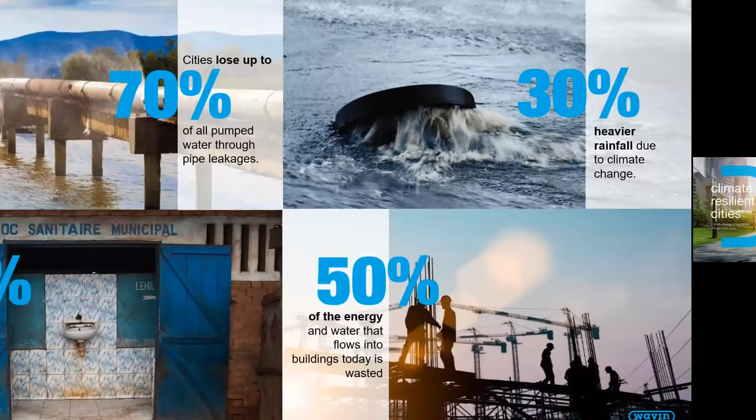It has major challenges, especially when it comes to water management. A few facts. If we look at pipe systems, especially drinking water pipe systems, cities lose up to 70% of all their water through leaking pipes. In developing countries, 50% of the people don't have improved sanitation. 50% of the energy today in buildings is wasted, and rainfall due to climate change is increasing by 30% in intensities. Those are facts that really need to be acted upon.

That's also defined by the United Nations. The United Nations sustainability goals like clean water and sanitation, industry innovation and infrastructure, sustainable cities and communities, and climate action. Those are the typical challenges that are also addressed by Wavin, and we want to make meaningful impact on this world with the challenges it has. And that's why we have the goal of building healthy and sustainable environments.

We do that based on four pillars. In line with the challenges that I just introduced, we want to improve the distribution of drinking water and make sure that it's clean from source to tap. We focus on acting upon climate change. We want to future-proof the wastewater transport, making sure that there is sanitation for all. And we want to improve the building environment, making it comfortable and healthy living inside buildings. That's what we do as Wavin.

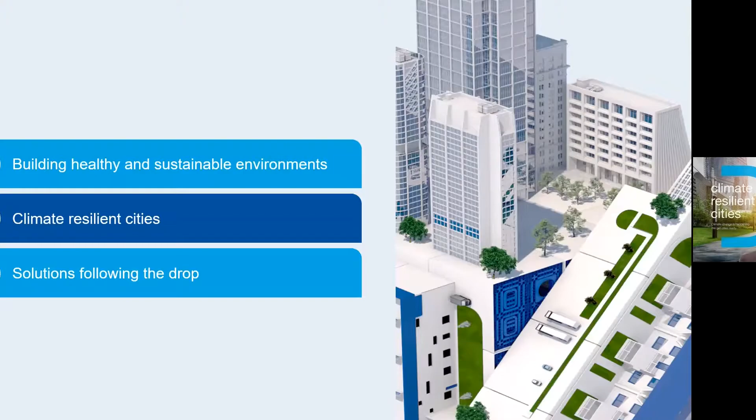Let's take the next step and zoom into the business which is closely related to stormwater management, and that is climate resilient cities. Well, there are also significant challenges when it comes to climate resilience, especially of cities. And a big driver of that is urbanization.

Cities become more compact, more dense, which means that there is less space for infrastructure to drain water away, for green areas that can absorb water. And at the same time, there is more drainage discharge to sewer, and there is more demand of clean drinking water. So urbanization puts a lot of pressure on all of our water systems.

Besides that, there are the three main trends which we see coming from climate change, which is floods, droughts, and heat. And especially in cities, heat is a problem due to the heat island effect. But what we also see is many of the cities around the world are actually sinking, especially because most cities are localized near to coasts, and sinking cities is a big problem, and that has all to do with groundwater levels. And last but not least, pollution is a big problem in cities, impacting also our environments.

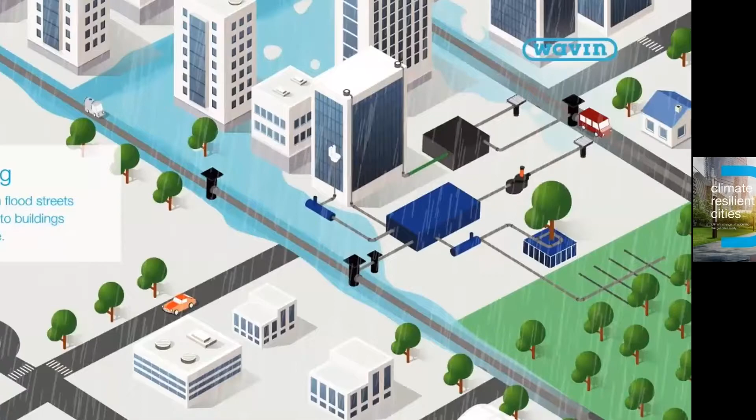I would like to dive into the climatic problems in a bit more detail. So if we look at flooding, and well, we made a video for those climate challenges that we face in cities. If you would like to watch that, you can scan the QR code, but I'll take you through it just in presentation mode.

In cities, especially because of all the hard surface, rainwater cannot go easily into the ground. And all the hard surfaces create a lot of runoff of rainwater, and all that water has to go somewhere, and it will generally go to the lowest place. So especially in a slightly hilly environment, the lowest area will soonest be flooded. And with an increase in rainfall intensities, so more rainfall in shorter periods, that will even become worse, causing all kinds of damage.

But also the other side is true. When we look at climate change, we see that the drought periods are becoming longer, which basically means the availability of water is going down. It has effect on the environment, the green spaces in cities, but it will also impact water availability in the ground, so to say.

Well, with the rainwater, when it's draining, it also takes a lot of pollution from the street. And also that is a big problem. And many times the rainwater systems are connected to our open water system. It is just draining into our rivers and seas and oceans. So the rainwater flows can indirectly cause quite some pollution. So it's very important also to have a closer look at that.

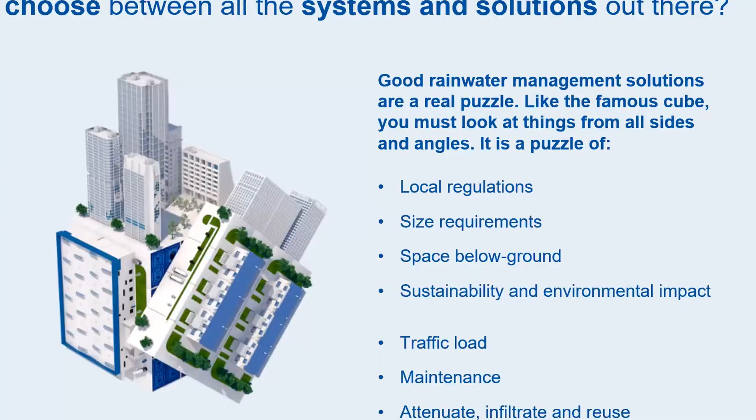Well, I hope with the following part of this presentation, I could help you to make decisions in the right way on the solutions that we have and that there are when it comes to climate resilience. So let's go to the solutions. I just showed you the pictures of the different impact of climate, and there already you saw all kinds of solutions identified, and there are solutions for every part of the storm and rainwater management systems. And I would like to go over them all 11.

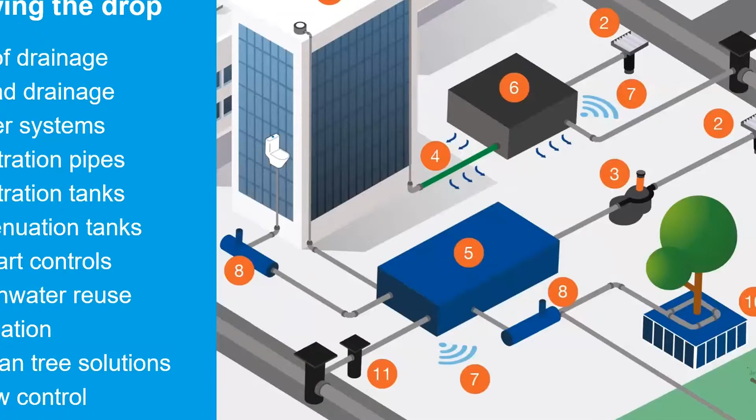It is roof drainage, road drainage, so where do we collect the water, then filtering water, transporting it and feeding into the ground, but also regulating water for either the use of it or going back into the drainage system with the controls that are needed for that. So we are going to follow the drop.

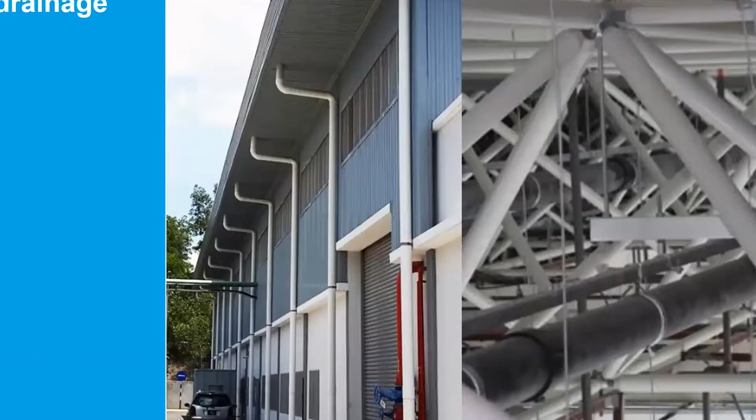During the presentation, I will focus mainly on the roof drainage solutions, the infiltration and attenuation tanks, and our urban tree solutions, but I will go over everything at least shortly. So let's get started with the roof drainage. Well, what do we mean with roof drainage? Two pictures to show that.

You can see here a downpipe on the outside of the building, this white pipe that you can see on the roof. There is an outlet, and the rainwater is being drained downwards. On the right side, you see a picture in the structure on the roof on the inside with the black pipes. That is also a drainage system which is actually hanging inside the building on the roof. Well, let me dive a little bit in more detail what these systems are.

So we have two types of systems. We have conventional systems and we have siphonic roof drainage systems. So what is the big difference? The big difference is that a traditional system is a system where water and air are mixed in the system. So we just have an opening in the roof, an inlet there, and a pipe just letting the water in, but that will go with air together, which means that basically it is a gravitational flow, and there needs to be a slope, a gradient in the pipe, otherwise the water will not flow

down. Siphonic systems are very different when it comes to that. There, the pipes are fully filled with water. A baffle is used, a special inlet basically preventing air to go into the pipe when there is water on the roof. And with this, you get a siphonic system. You basically get all the weight of the water in the pipe sucking the water from the roof. And that creates much higher velocities in the pipes, and that has all kinds of benefits.

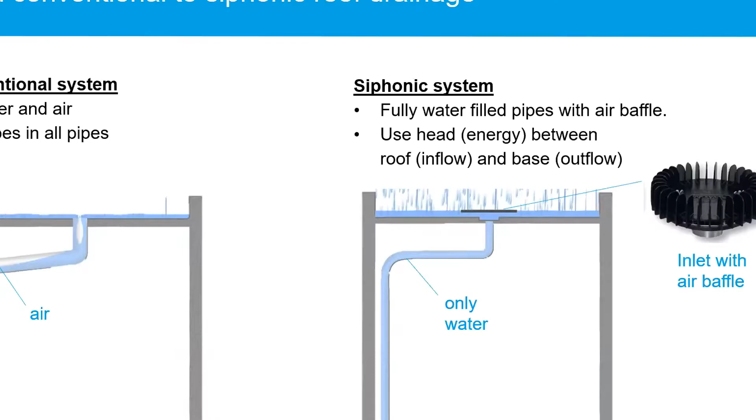So let me give you a short comparison of how that works. So on the left, you see a standard conventional system, and on the right, you see a siphonic roof system. Wavin has the Wavin QuickStream system for that. Well, ultimately, it gives up to 50% cost saving to use a Wavin QuickStream system.

I was just telling you that due to this siphonic idea, you have much higher velocity in pipes. This basically means that more water can be transported through that pipe, but also it means that due to high velocities, the pipes will not contain any pollution because they will basically flush out. And with those high velocities, also the diameters of the pipes can be much smaller, which in the end results in a cost saving.

But also the pipes do not need to be at a gradient. So if you have the pipe, it doesn't have to be lower at the end, it can be horizontal, which saves a lot of space when it's attached to the roof. But it's also the benefit that basically you can connect all the pipes and go down with just one downpipe. So you need much less pipe length, whereas in a traditional system, all inlets of the roof need one downpipe. And then you need a gradient system, which you need to dig into the ground. And all of that is not needed anymore because it can be connected to the roof and then installed inside the building, also improving the durability of such a system.

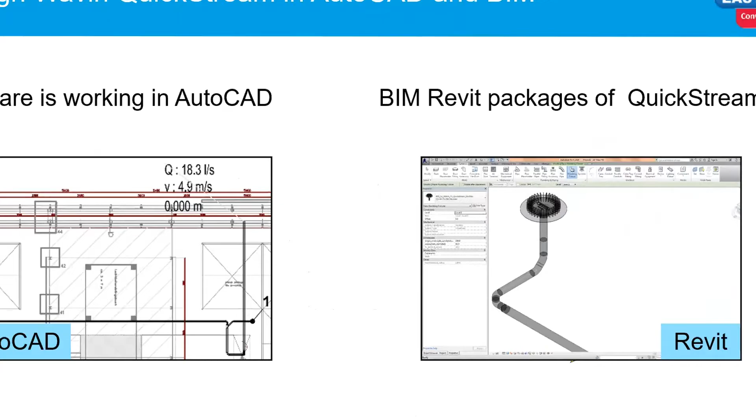We have a special software package to make a full calculation to make sure that a siphonic system works. You need to do some calculation. That is the only thing that you need to do extra compared to a conventional system. You need to make a calculation because there are a few risks in such a system which you can avoid by doing the proper calculation.

Well, we have a very good software to do all the checks, checks on whether there's a good balance, that the outlets get sufficient water, that they don't start getting air in the system, but also that the under pressure in the system is not getting too low, that you get damage to the pipes. It makes sure all pipes are fully filled and that they always stay clean. So all the checks are done. If all the checks are good, then we release such a system for actually being built. With our calculations, you can be confident that your siphonic roof system is also working correctly.

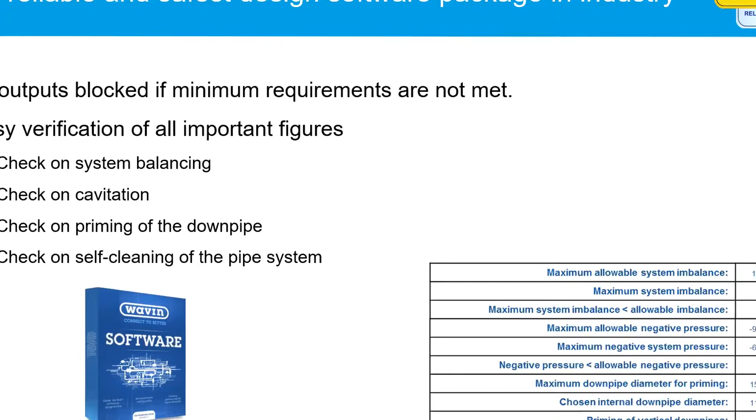And we should realize that these systems also need to be very robust. These systems are made out of PE, polyethylene pipes. If you have 100 meters of pipe with a change of temperature of 30 degrees, then the length of the pipe will change by 60 centimeters. It means that enormous forces can actually start existing on the pipe connections to the roof. And therefore we have a special bracketing system. We have this fully calculated through with a finite element method and agreed by an engineer that this is a system that does the job that it actually needs to do. So you can be sure that the system will not break in changing weather conditions, changing temperatures.

And besides that, it is also a really easy to install system. So also installers will like it because, yeah, you can just place the pipe and tie it with very limited effort.

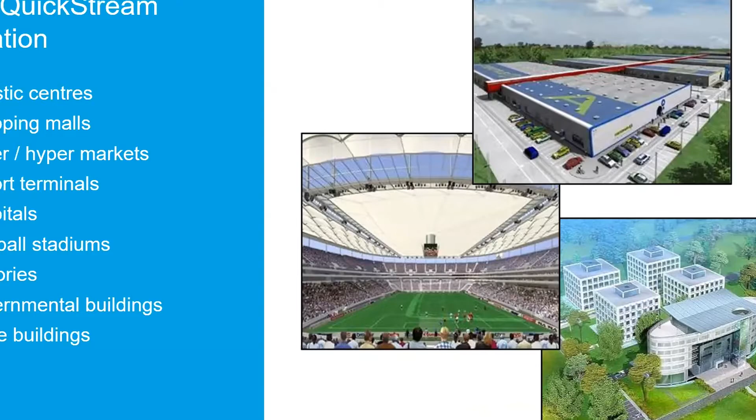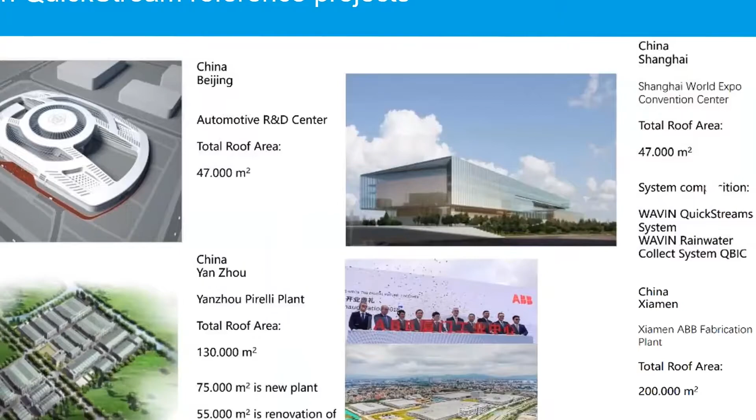A few pictures of projects, and also some references of large projects that we have done in China, for example, in automotive, but also Pirelli, the tires, for the World Expo, the building, and one of our largest projects for ABB, the electronics company. Yeah, we really know what we do, and I hope you will also trust in our systems when it comes to that. Let me take the next step.

We do not only need to drain the water from the roof, but also from the other hard area, which is the street or the square or whatever. And I am presenting this to you as a global product manager. I'd like to have said that also. So I'm going to take you through the portfolio that we have around the world, but not always specifically in every place in the world.

So what we do in Europe, we have a great drainage system with gullies. As you can see, we have a whole range of different gullies, as there are different practices in every country. But when we talk about road drainage, we know that this should be durable systems. One of the things that we have been doing is actually testing our gullies in front of the factory of Scania, the big truck manufacturer, because they had big problems with concrete gullies that would break every time. And we have installed our Tegra road gully, which is super robust, and they are very happy with that. Since it was installed 2.5 years ago, it's working perfectly, no damage at all.

So it shows that plastic systems can actually be much more robust due to the flexibility and the design of the material. With that, we make sure that this is something you can rely on also for long term. And not only when it comes to the forces that go on it, but also on the performance. We have designed a gully where we make sure that it will always drain the water out, but also prevent pollution to go out. And that's what you can see on the right side.

You can see an outlet and a circular filter. Water will flow through the filter, and it can from all sides go to the outlet. That means that it will not easily block, but it will hold all the litter that is running from the street into the stormwater system, and in the end that ends up in our channels and our seas or oceans. And last but not least, this is a fully recycled product. It is one of our ambitions to not make any new products anymore in stormwater management that are made of virgin plastic. We all aim to do recycling, which is very important when it comes to CO2 emissions and our environmental footprint.

So the next step is, once we have collected the water either from the roof or from the road, and we have done the basic filter with the gullies, we should look at what does this water contain more, and does it require more treatment, especially looking further down the chain. For example, if you want to reuse the water, it is very important that the quality of that water is good. So we do have a portfolio of that as well, especially in Europe. That is a portfolio of oil separators, hydrodynamic separators, sediment separators, and special substrate filters, where we use special substrate to take heavy metals out of the water.

So there's a whole range of products depending on the situation where you are, what kind of pollution that you have, and what kind of drainage system you have behind. It might be different, for example, if you have your stormwater drained into a combined sewer system where also foul water is in, that in the end will also be treated at a wastewater treatment plant. But in many cases nowadays, these systems are separated, and it's important to also install filter systems, especially if you want to also drain water into the ground, to make sure that the groundwater remains of good quality, as groundwater is the prime source for drinking water as well.

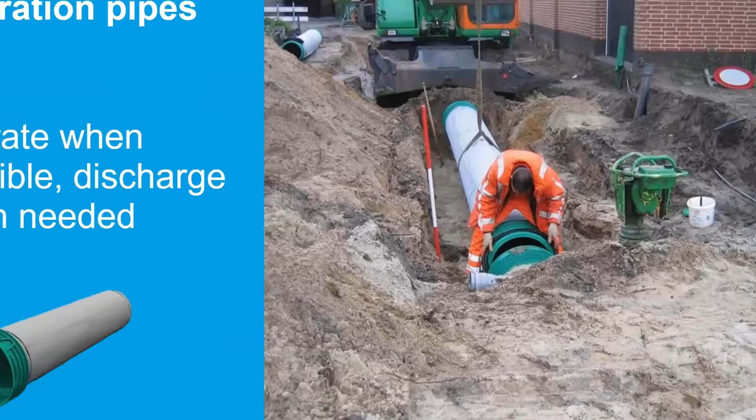That was about the filter system. Then a little bit on the transport. Of course, you can transport water with traditional pipes, but we as Wavin would actually promote infiltration pipes. The reason is that in many cases it is beneficial to drain water into the ground if possible. So if you have a groundwater level that is going down all the time, you want to replenish that, recharge that, and that can be done with an infiltration pipe.

An infiltration pipe basically is a leaking pipe. It's a pipe with slots and a geotextile around it to make sure that no soil from the surroundings will flow into the pipe, but only water can flow out of the pipe through the walls. It works like this: if you have a low flow with moderate rains through the pipe, water will not reach the end of the pipe, but it will flow into the ground, recharging your groundwater and also avoiding supercharging the sewer system further away.

If you get higher flows, then still part of the water will drain through the pipe wall into the ground. But if there is too much water, it will just continue to flow and work as a conventional pipe, and the water is drained via the pipe to the end of the system. So something to consider in your designs if you are doing things around the building.

So that was the example. For example, after your downpipe, you could connect it to an infiltration pipe before going to an infiltration tank or an attenuation tank, as you can see on these pictures. So, connecting your rainwater system to an infiltration and attenuation tank. Why would you do that?

Well, floods in urban areas do occur. Of course, they can occur from an overflowing river, but what I would like to focus on is floods due to rainfall. They occur because basically the sewer system cannot handle all the water. All the pipes are fully filled, and then more water is coming. It needs to get out somewhere. You can get overpressure on your system, and water will just get out from every manhole like you see on this picture, and it will flood the streets.

So what do you need to do? You need to create space for this water to go to instead of the sewer, which cannot handle it. That is what we do with our infiltration and attenuation tank. We basically create a volume below ground that can absorb all the rainwater during the heavy rainfall and either infiltrate it into the ground, an infiltration tank, or just hold it back and, with a gradual outflow, put it back into the system without overcharging it.

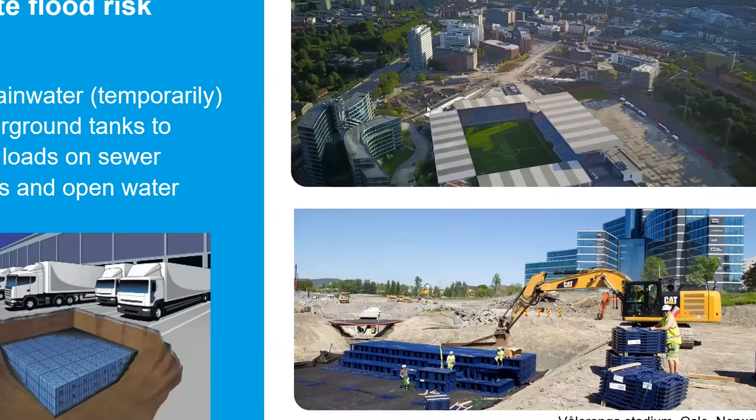Here you can see a few examples, below a car park of trucks, but a specific example here near a stadium in Oslo, Norway, where you can see on the bottom part they are digging this big hole to have all the rainwater drainage from the stadium and the car park going in there, and after that connected to the sewer, not overcharging it.

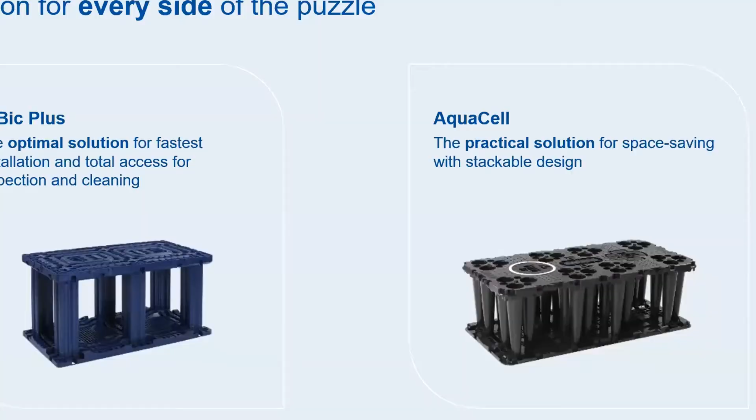This is very common practice in many new build areas, because the regulation in Europe, and I'm not sure how that is in Malaysia, is that if you build something new, you should not increase the risk of flooding due to rainwater. So a solution is mandatory, and this is the very common solution. We have two products to do this with: Q-Bic Plus, which we call the optimal solution, and a more practical solution with our AquaCell.

Our Q-Bic Plus is a system that is very open and is made to last. Made to last means it's designed to last for at least 50 years when it comes to structural strength. So if you put it below ground and you have traffic driving over it, it will stay there for 50 years without any problem.

But also made to last to make sure that it keeps on working as it should. So even if you have, for example, some pollution in your tank, you will be able to inspect and clean it. Therefore the open structure that you can see on the right side is very important, so you can make sure this tank will last the full lifetime.

For the designers and architects looking for a solution around the building, we also have the opportunity to include it in your BIM Revit design. We have a full package for these products. You can rely on us.

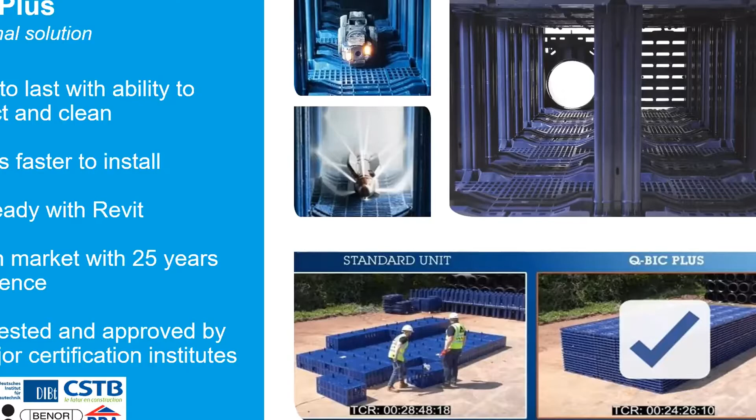That truck doesn't have to drive, so it is also lowering your CO2 emission, but also making logistics on the building site easier, and the space that you need on the building site or in the warehouse. So this system also has all kinds of benefits and will work in similar conditions as a Q-Bic Plus system.

Well, if we have water in a tank, then we could actually not just do things like I just told you. We could also do another thing. So we could infiltrate it into the ground. We could hold it back, feed it back into the sewer system just gradually so it doesn't overcharge it. Or we keep it as long in that tank that we can actually start using it. But there is, of course, a contradiction. And that's what I would like to talk about shortly.

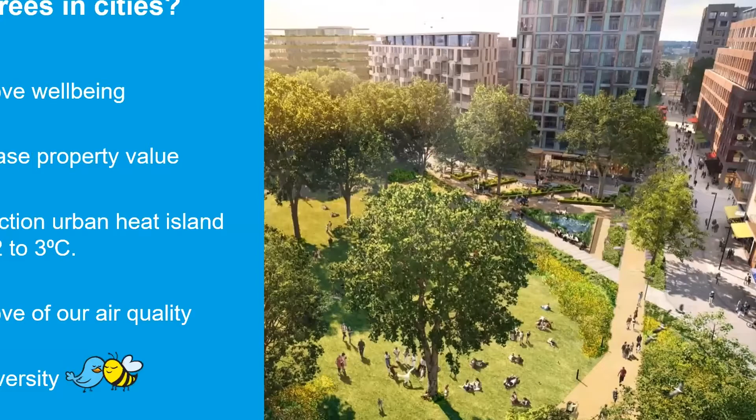So it is very important because of the well-being of people. It is also a financial benefit. And that is very interesting. Areas where trees are planted have more value than areas without trees. So basically it increases real estate value. And trees work as an air conditioning for the city. So they can cool down a city by 2 to 3 degrees. And just to give you an idea of what the effect of a tree is, one tree equals 20 to 30 air conditioning units. So it can have major effect.

So meanwhile, we have seen also that the urban heat island effect, the effect that cities are even hotter than the outside, is 5 degrees to 10 degrees more heat in the city. So it's even more important to have trees in the city, not just outside of them. A nice thing about trees is as well that they increase the air quality. They filter out all kinds of harmful dust and pollutants, and they take carbon dioxide out of the air. And last but not least, it is improving urban biodiversity. It's about the birds and the bees, so to say.

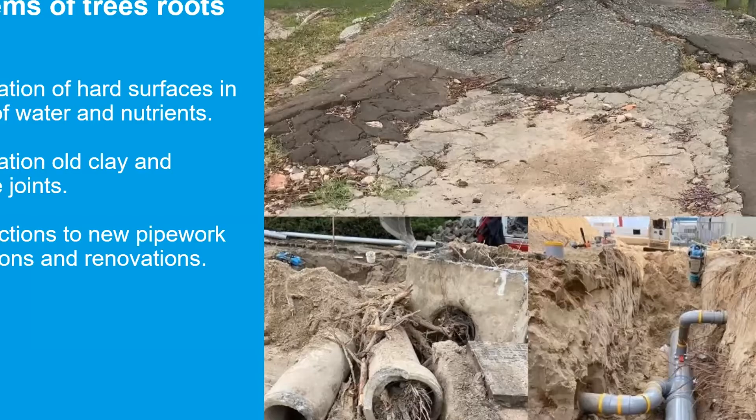Well, that's a tree tank. The tree tank is a perfect solution to create the optimum for trees and the optimum for the city. So basically what we do, we create a tank below ground that can be filled with the right soil, with the right air amount and water amount in it, and we plant this tree inside that. This is then the perfect condition for the tree to grow, and the tank will take all the forces of a road construction, of a square or whatever is on top.

So the loose, good soil for the trees can be inside the tank, which doesn't need the level of compaction to support the infrastructure use of the city. So it's a confined space. So the nice thing is the tree roots will not start growing outside. They will not break the road surfaces. So that will also avoid a lot of damage and costs. It will prevent unsafe situations. And it might even have a positive effect on your stormwater management because it has a volume to store rainwater as well. Well, what does that look like in practice?

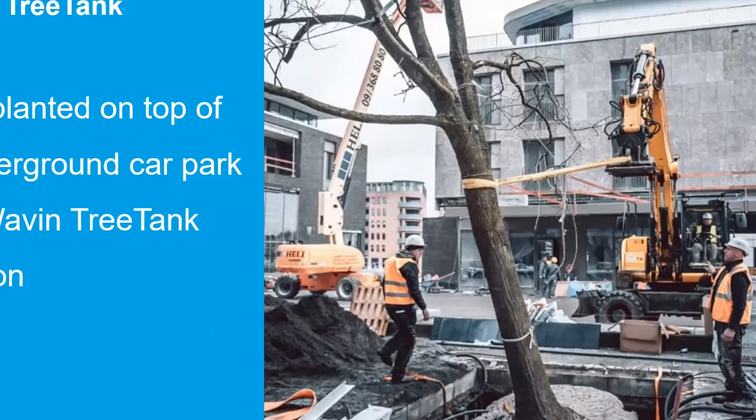Here you can see the tank all the way below ground. On top, there is full paving. This is actually on top of an underground car park. So the bottom is concrete, then we have a tree tank, and then we have a concrete topping or a paved topping again for a shopping area. And a tree is planted, and the tree likes it. These are actually conditions where you would say, well, how can a tree properly grow there? Because it's fully artificial, but with this tree tank, it is thriving.

And this is after the first year. You can see the same tree standing there. It has perfect leaves on it. It really is growing and growing. And in this way, we can contribute to a climate resilient city, but also to a great, pleasant, livable, lovable urban environment. So those were the steps if we follow the water from the roof to a tank and then reuse it and even build nice areas for trees.

But in some cases, unfortunately, we need to drain the water. And if you drain water back into a sewer system, as said, it can be overcharging the sewer system. So to make sure that this tank is not draining into your sewer system very fast and still overcharging the system and creating flooding, we have special manholes with controls in them. Those can be, for example, vortex valves, which you see examples of here. Those valves actually make sure that there is a constant flow out of the tank, not too much, to make sure that it's all controlled and the sewer can still handle it.

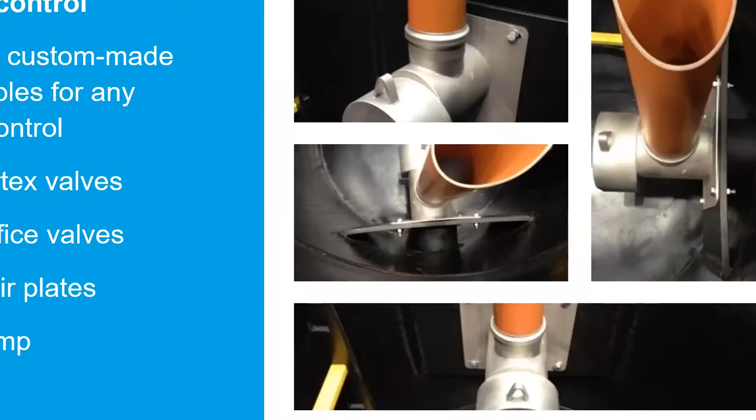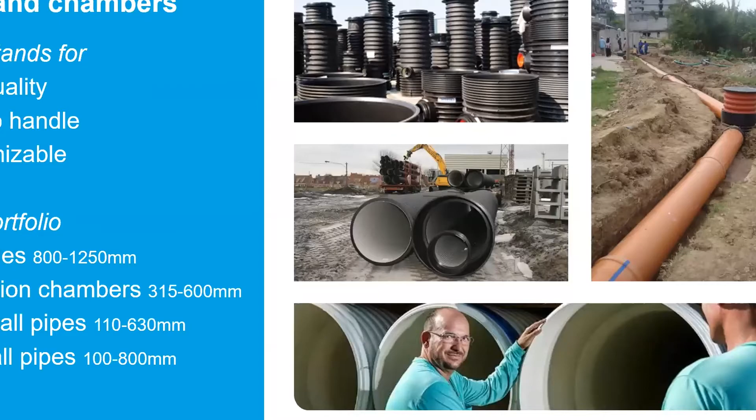And then in the end, water is flowing to the pipe system, pipes and the chambers. So that is what you can see here. We have a big range of chambers, manholes, inspection chambers. We have solid wall pipes and twin wall pipes, going from 100 to 800 millimeter pipes, and inspection chambers and manholes from 315 to 1250. So basically always something that suits.

And then it is important to realize what we do is quality. That's what we stand for. We make sure that all our systems have a lifetime of at least 60 years. And we design things to be easy to handle and, if needed, customizable.

So all in all, if we follow the water either from the roof or the street, we can clean it, we can infiltrate it, we can buffer it to make sure that water doesn't overcharge the sewer system, and we can reuse that water even with some smart controls going back into the building, for example, for sanitation or for irrigation.

And we can even make sure that also trees have the perfect environment to grow, and we can even feed it with the water from those tanks. And if that is not possible, we can drain the water via controls into the pipe system. So for every part of the rainwater management, there is a solution. We can make cities climate resilient. So let's build climate resilient cities together.